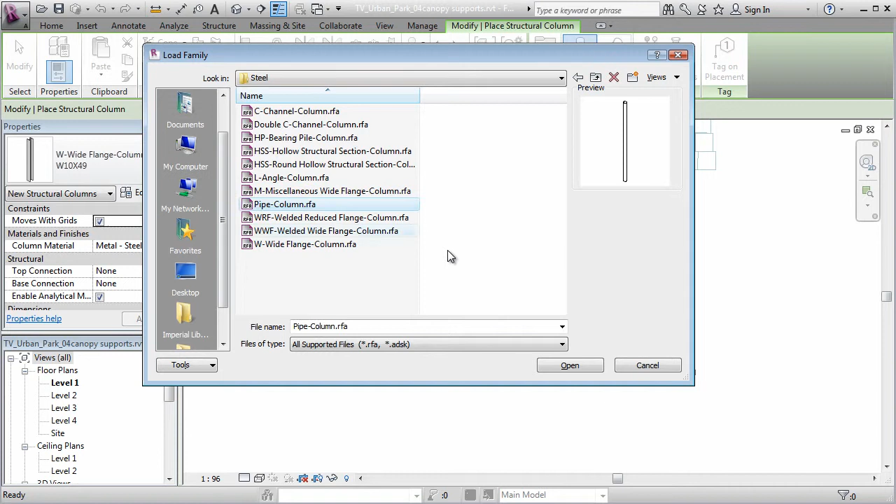And there's my 6-inch standard pipe, which is the one we're going to use. What we'll do then is, for the brackets, make them a custom-made family that fits this column very nicely and allows us to place multiple brackets easily.

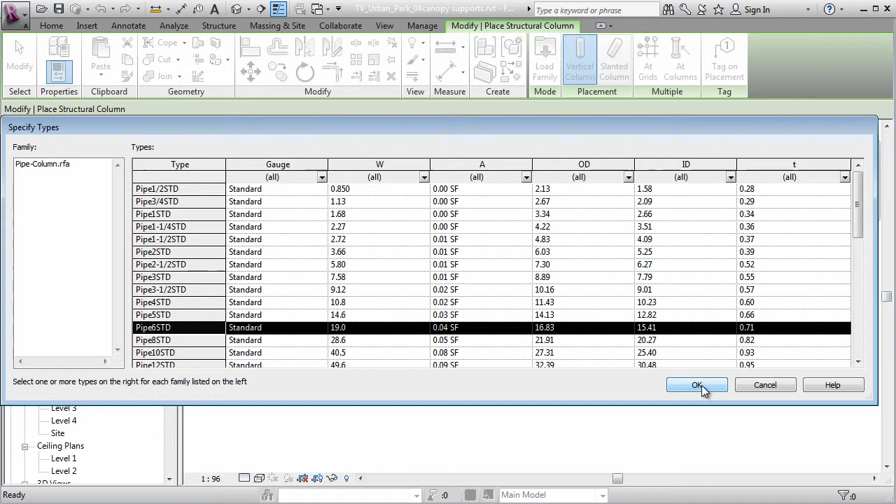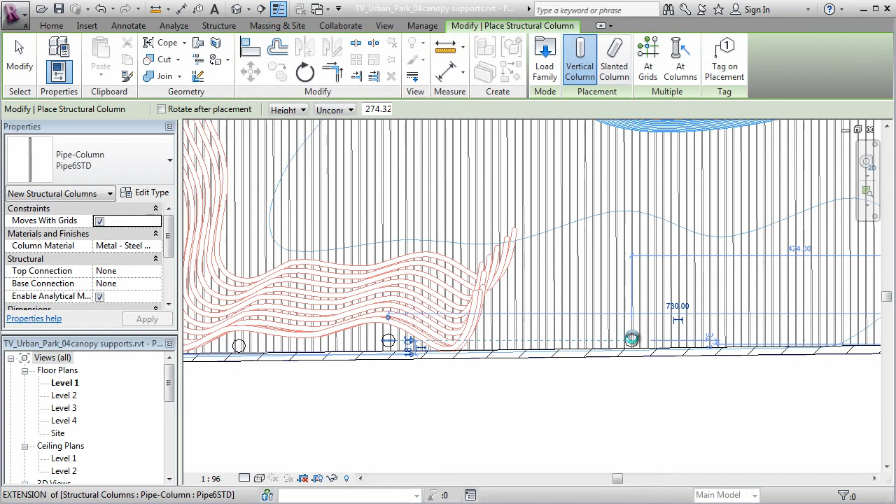I'll hit OK. Now my structural column, making sure it's a vertical column, I can zoom in and place these. I'm going to put one kind of right here up against the wall, in the swoop of the bench, and possibly another on line with it and next to it, and then two more further down the wall, following the humps of this line here a little bit, to make sure we have adequate support for our canopy.

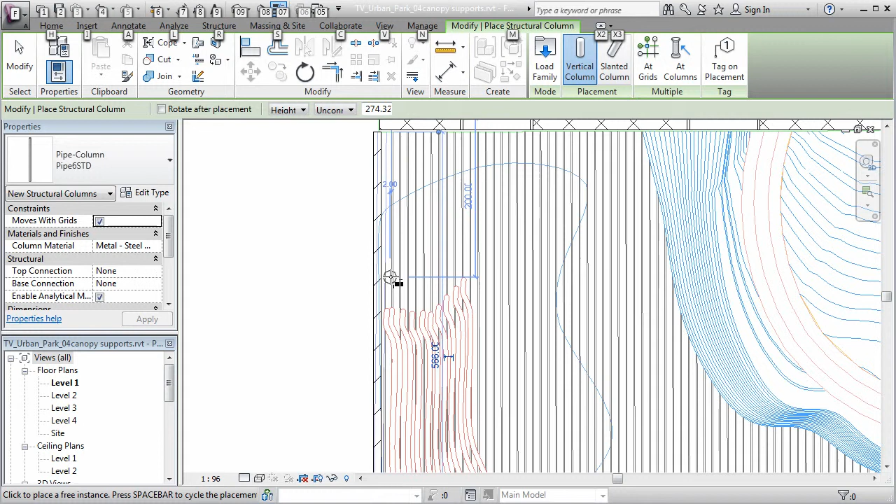Let's go ahead and place this. There we go. We can always move these afterwards, which is the nice thing—it's never really set in stone. This one I'm actually going to pull out from the wall quite a bit to hold up this bench and let there be a space behind it, because this canopy tends to swoop out pretty considerably. And I'll do one more here at the end of the bench, as the bench will curve down, and this will hold up this outer edge.

So now I've got my columns in, and I'll go into a 3D view and see how they look. So I've gone into my standard 3D view here, and there's my columns all placed nicely down at zero. We can see where we'll have decking go around them, and there's the bench and the coastline sculpture and so forth.

The really nice thing about these is if I go to modify and I choose multiple columns in here, holding control to select, and I do things like changing the top level or top offset or otherwise—in this case let's make the top level level 2, with no top offset, and I'll hit apply—those columns now size right up to level 2. And this is true for any object like this; anything else I change with it, they'll take on those properties.

So I'm going to select all of these columns for now, and over in the properties I'm going to take off the top offset, zero that out, and their top level I'll drop down and pick level 2, and there's that offset gone. Okay, I had to do the level first, and I will hit apply.

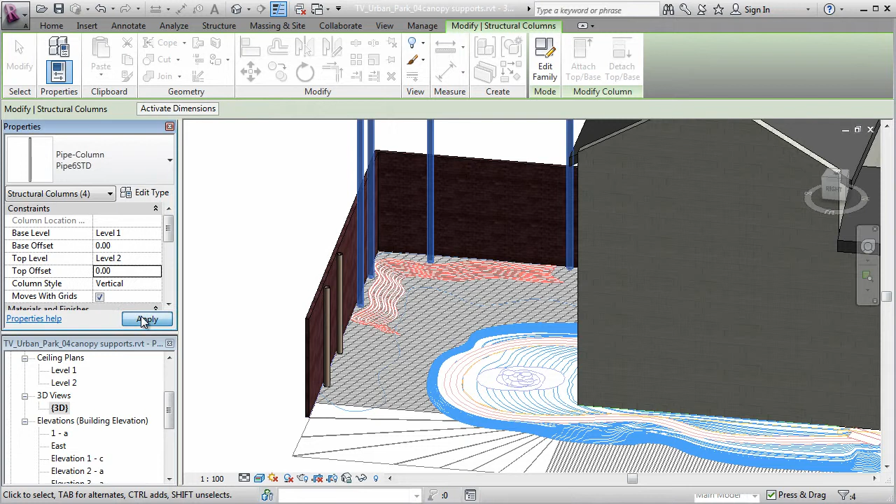Giving me a minor—oh, there's my minor error. Yes, I'd like all of them to go up to level 2, and I'll hit apply. Now I'll take out all of their top offsets and apply. And they all jump back down. Sorry, I just did that in the wrong order—good to illustrate, though. I'm really not set in stone here. It's very malleable, so don't be afraid to change things if they don't look right. That's perfectly fine to do to get the design right.

In the next round, then, we've got the columns. We'll go in and place brackets once we've made them.